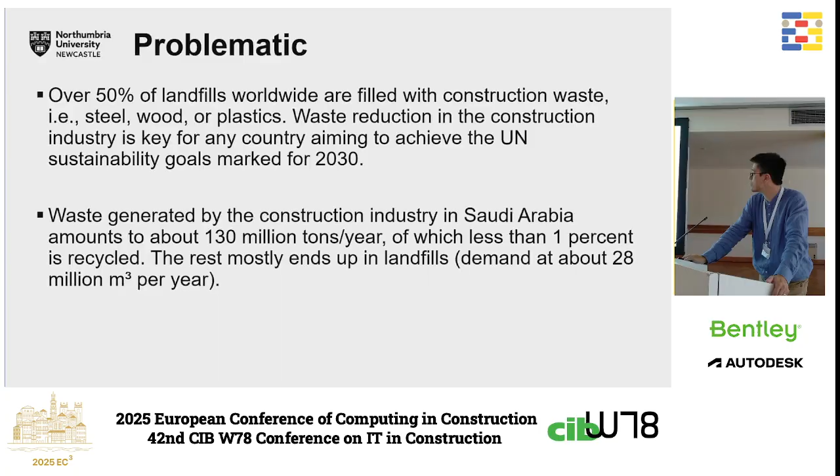Recyclability is another issue. So how can we tackle waste in a proactive manner, not just handling the landfills or the space it occupies, but giving construction companies a reason to be proactive in the waste management process and reduce it by their own means? So basically it's talking about the value of waste. I'm not talking here about demolition waste, just purely the waste generated on construction sites while the project is ongoing.

So building site waste is generated and accumulated in different points across sites. Usually if you have a proper waste management process, those points are well located in a specific location, maybe moving across time, but always in the same space. And you don't really know what's being thrown in there until somebody, usually from a third party, picks up your skip whenever it's full, and then it's weighed, and you get charged based on it.

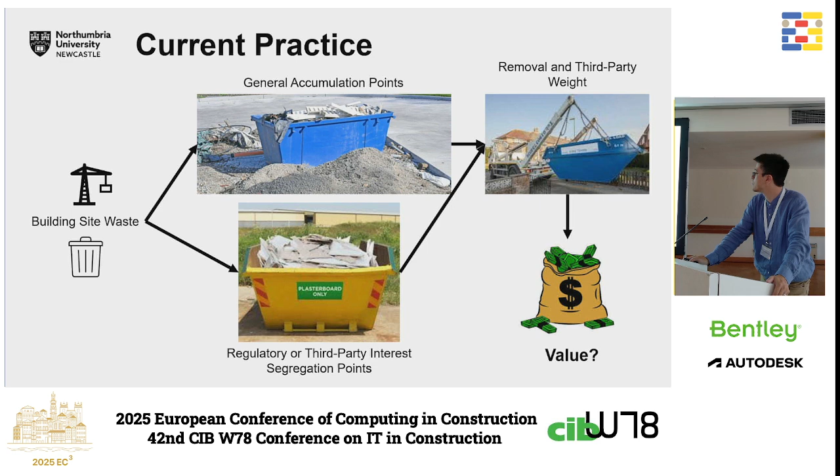So at the end of the project, you know more or less how much weight of waste you've generated because you're being charged for it, but you don't really know how much you've thrown away, so you don't understand the value. And that is where our project starts. Why can't I just tell you how much waste you're generating in projects so that you can understand how much you're actually throwing away in terms of money?

So this project aimed to develop a system that can understand how much waste is being generated and thrown away in skips, focusing on value-added information and providing a cost-effective solution, because we cannot just put a 60,000 or 70,000 pound system to visualize what's worth a few hundred maybe. So a really cheap, very simple system, and a framework around it that enables construction managers to understand how much is being generated on their sites.

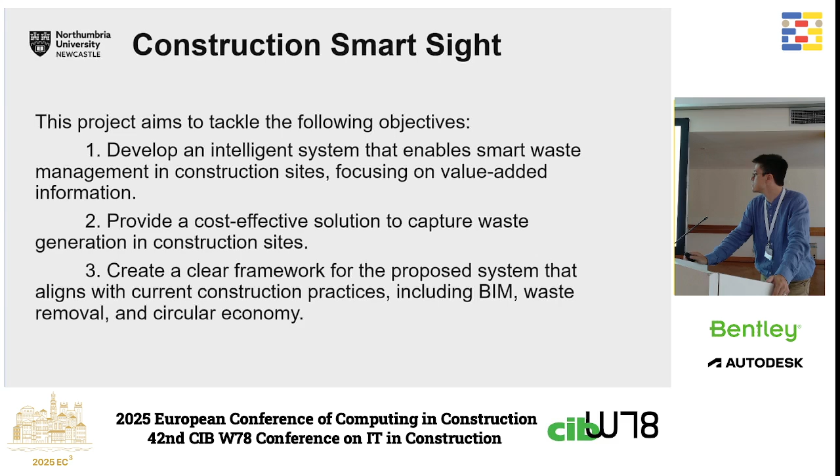So the framework is quite simple. You have a set of raw materials that go into your construction site, the usual types: bricks, steel, wood, ceramics, etc. Then there are different construction processes and activities on site, and future work will link what is being generated to the construction schedule, for example. But so far, the scope of this study is just whatever happens on the skip, at those collection points, capturing that data through video.

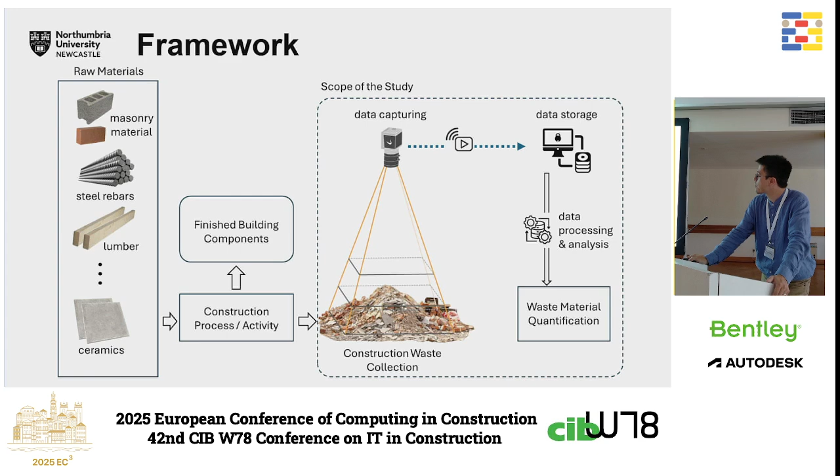So basically having a camera recording that skip over time, storing that information, and then processing it to quantify how much waste is being thrown away. The system is quite simple, as I said. It's just a camera on top of the skip to visualize what is actually going on. Not all of them actually look like that.

That is just an AI-generated image. But basically, the temporary structure that you create sometimes might not be necessary. You may use scaffolding that is already in place. You can use any other type of structure that allows you to actually put a camera on top. The camera is like 300 grams, so anything can actually hold it.

So usually what you have to do is really just minimize the distance between the skip and the structure, but also at the same time put it high enough so that it has clearance for the skip to be removed, so you don't want to interfere with the waste management process. In this case, the cameras are usually located between 5 to 6 meters high, so you get an idea that it's quite a high system.

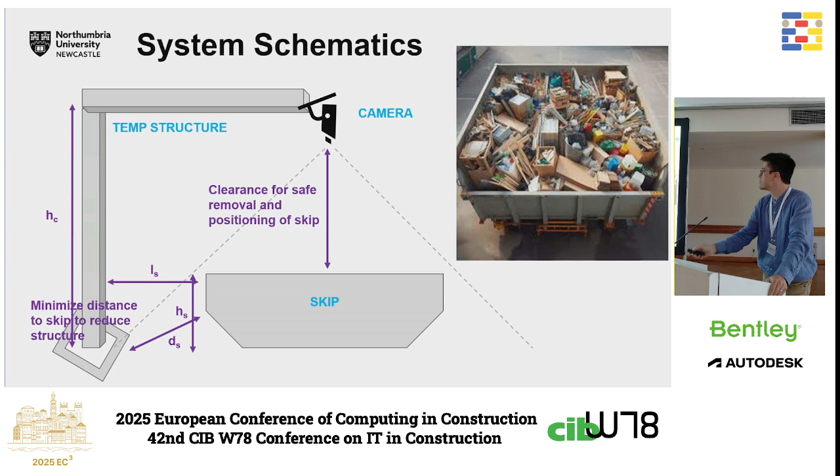But nonetheless, once the camera is installed, it doesn't really need to be exactly located in the center of the skip. The skip might be located in one place, and when they remove it and put a new one, it could be in a different location, more or less in the same space, so you have to be flexible in terms of orientation, angle and position. So it doesn't really matter. The algorithm is quite simple.

In terms of computer vision, you need to have a way to identify whether the skip is being placed and loaded and unloaded, so that you have a way of defining what is skip 1, skip 2 and skip 3. You have a waste tracking and classification process that is triggered the moment that there's a skip on the site, and you go frame by frame, basically.

That creates a time series of information until the skip is unloaded, and then you start to look into waste quantification and waste composition. That only happens when the skip has been unloaded. So basically, you capture information until the skip disappears. That is when you calculate all your weight quantification, and the moment another skip comes in, you start again. So the algorithm is quite simple.

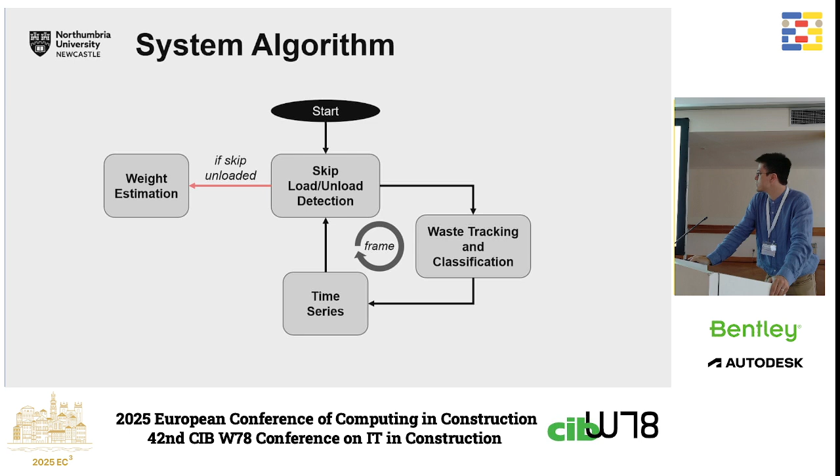So how do we do the skip load and unload detection? As I said, everything I'm going to talk about is quite simple. It needs to be simple because we're going on a frame-by-frame basis. When you throw waste into skips, especially not just somebody by hand, but an excavator bringing up a lot of brick, if you really want to look at every single brick being thrown in, your frame rate needs to be very quick.

So all the filters need to be very quick to be processed by a single laptop or anything like that attached to the camera. In this case, it's a very simple background subtraction and motion detection with very simple filters that are image processing based. Basically, whenever we see something coming into the area that has changed the way the background looks, we assume that it's a skip.

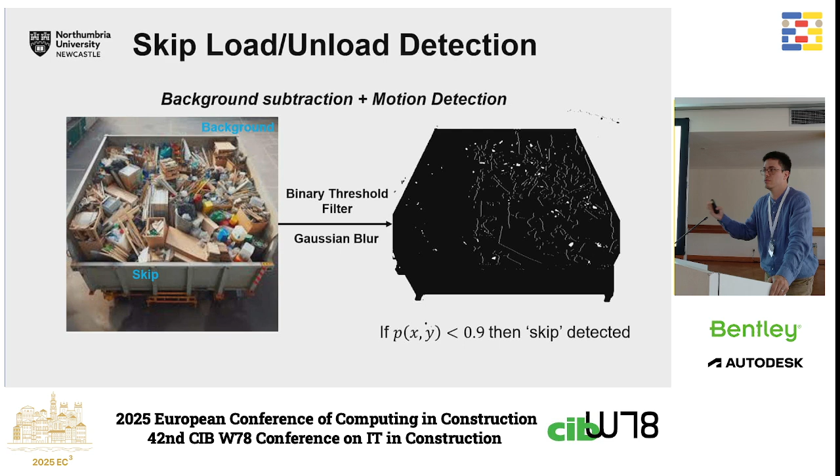That means that we have certain moments in which we get false positives. There's no skip in place, somebody walks through, that creates a skip, but it's no big deal. It's easy to filter out because usually there's no waste being thrown, so it will be just an empty skip that is easy to filter out.

The second part is basically tracking exactly how the waste goes through the image until it lands in the skip. We don't want to continuously capture the same elements, because if you're looking into a skip many times, the frames may look similar all the time, especially for the things that lay on top, and we don't want to count those all the time.

So we use optical flow estimation to see what the path of that specific captured point is, and once it's stopped, we keep track of that item and we don't count it more than once. It's mostly to make sure there's no overinflated counting of the same element in the skip. So you throw something once, and even if you detect it for the next 8 hours, it's just once.

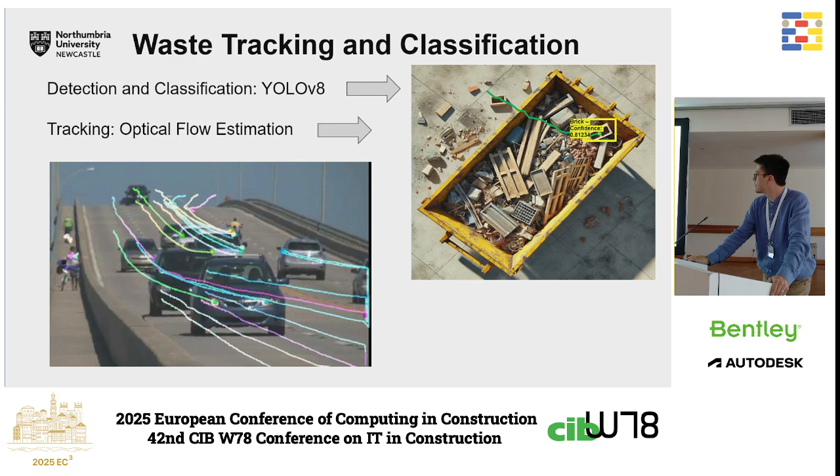The only issue that we have from now on is how you classify the different types of waste. I talked about raw material at the beginning. Waste classification in the UK, for example, has a very strict regulatory code with a lot of different classification methods, and it defines like 39 different classes and subclasses of waste. And we said, well, we can actually do that. So when we train our AI model, we use that classification.

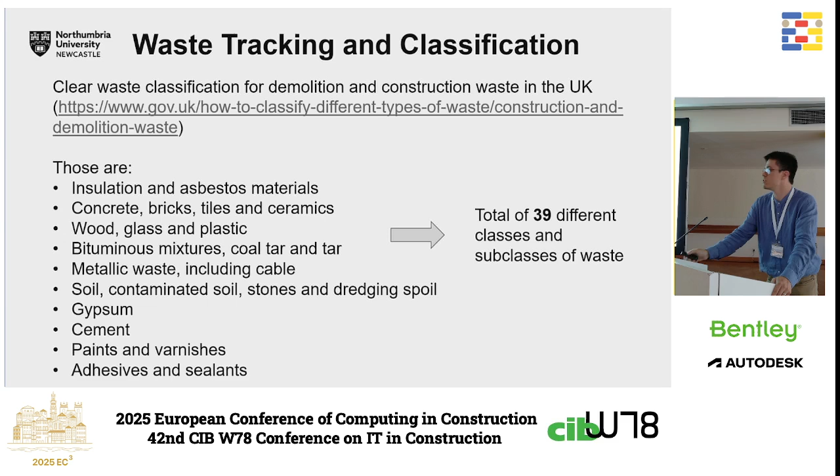That's not a problem, it looks like this in the UK. The problem is when you look at who actually receives that information to trigger some kind of circular economy: waste treatment facilities only use 13 classes. So that is something we're looking into for the future, how to link both classifications so they are better paired in order to help us make better classification processes.

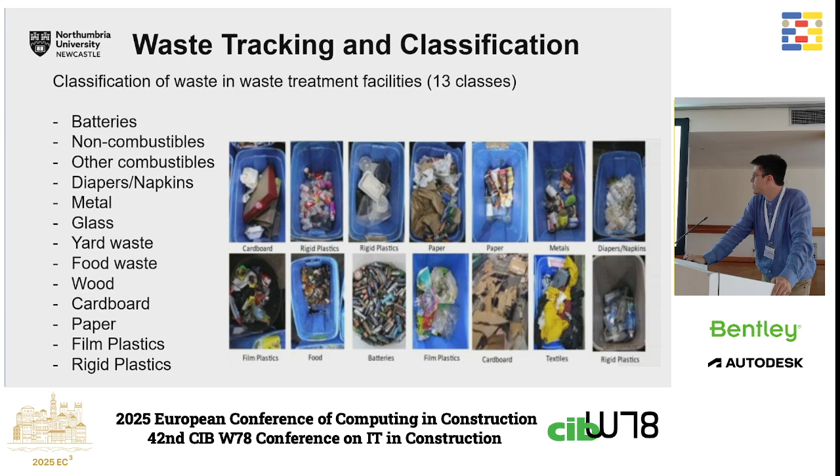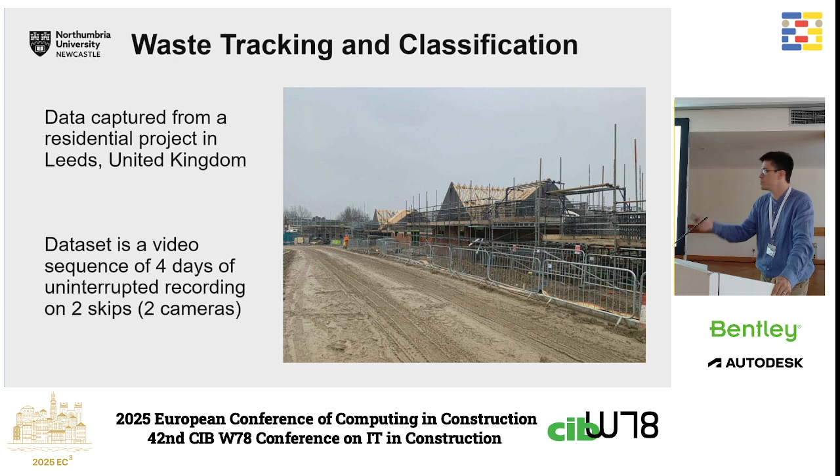But anyway, we use, in the end, the 13 classes in a project that was captured in Leeds in the United Kingdom. It's 4 days uninterrupted recording on 2 skips. Well, 2 skips on each camera, so 4 skips in total. And we use some of that data to train.

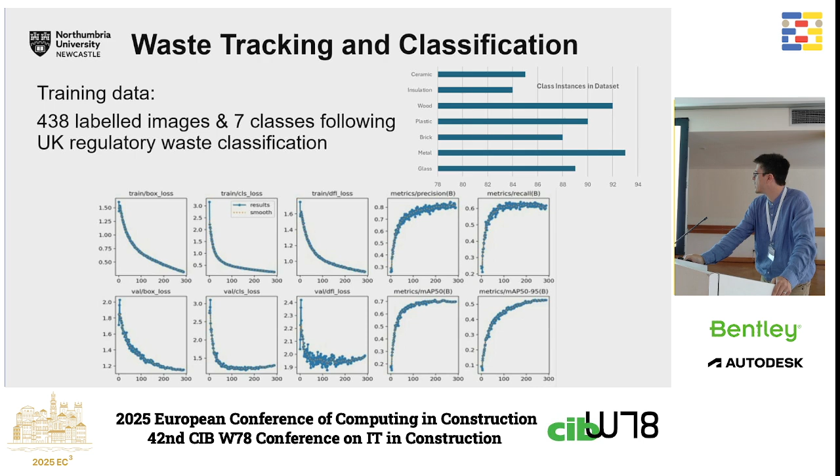So we basically labeled about 438 images of all the 7 classes, because I said 13 initially, but not all of the waste was actually visible in those days. So we only had 7 classes: ceramics, insulation, wood, plastic, brick, metal, and glass. We run it through, I think it was a YOLOv8 something model. And we captured basically all the data as it went through.

Finally, in order to get the waste of each one of the classes that is actually being recorded, we run it through a cumulative assessment where you basically divide, it's basically a ratio, if you want, of what's been detected versus the total amount of detections. And this is what you get in terms of results. So for each one of the skips, you get basically a percentage based on the weight that is being estimated, which again, I didn't say it, but we use bulk density in this case of the waste.

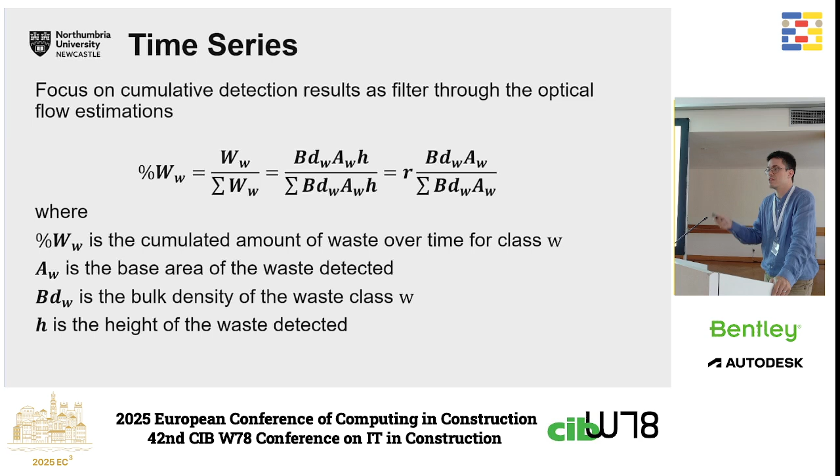We don't really know exactly what the density is for each one of the elements because we cannot identify, let's say, a specific type of plastic that's been thrown away. But in the waste management sector, there's something that is called bulk density. So if you throw a bunch of the same type of material, let's say hard plastic, there's an average density that you can use. So that's what we use in this case. And this is what you get. So you get basically a pie chart, if you want, of what the skip contains.

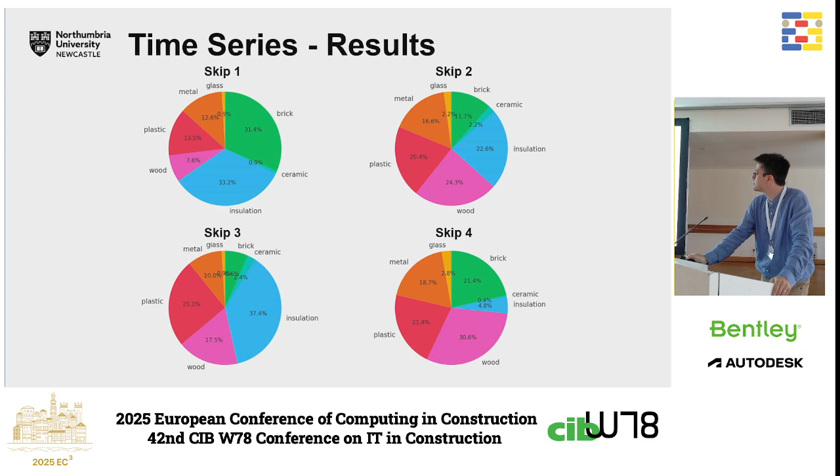Okay, so it could be, for example, skip 1, it's about 30% of brick, 30% of insulation, and that is percentages in weight, okay, not in volume, not in a number of things that you've thrown away. So the brick could be considerably low, but it's much heavier than the insulation, for example, and 13% in plastic.

So if we look at, for example, that skip, you will see that you can actually estimate the weight, and we compare the weight of each one of the elements that we captured for each one of the classes. So we went into that skip, we pulled it all out, and then we weighed one by one. So it was a lot of work. And we compare that to what the AI actually thought that the weight was.

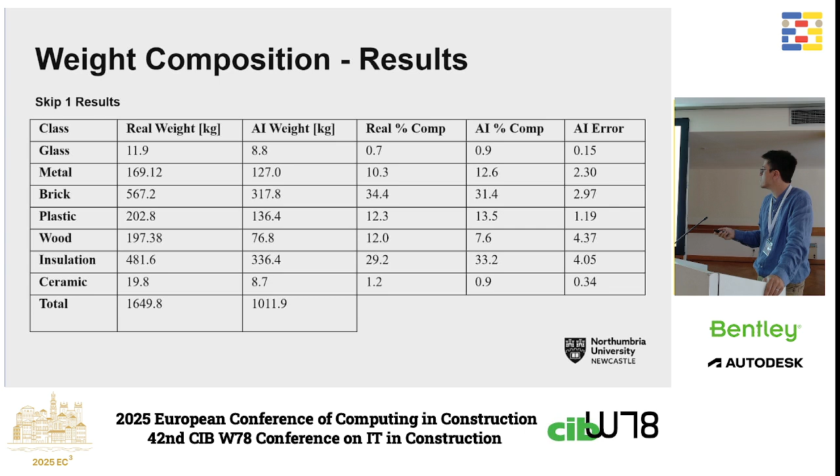And the reason for the weight being wrong is because usually we do estimations in terms of the shape of the form, since we're using very simple classification methods, not segmentation or anything like that, because we want simple outcomes. The volume obviously is definitely wrong, but that error that is being transported on any single estimation kind of evens out across all the different classes. So when you get a lot of data, it basically evens out and you get quite an accurate estimation in total. You get more or less 3 or 4 or 5% of error.

So conclusions, this is actually quite an alternative method to waste audits to get an estimation of the waste composition that you can create across construction sites. It provides a certain degree of automation that should enable at least the construction sector to actually start to understand more about waste generation in the projects, and obviously to reduce also the cost of those waste audits that actually happen on site. Especially in the UK, it's very important for hazardous materials.

And then, well, there's still issues that we need to go through in terms of all the stakeholders that should be aware of this type of material waste classification going on, that require maybe a lot more coordination to actually enable a more streamlined process in terms of information that is being generated by the system. And obviously trying to tie these results with what actually happens on site is our next stage, to try to understand really why this type of waste is being generated that day.

If that's something that we can tie, for example, to BIM schedules, it would be something very interesting, because if we can tie activities to what's generated, then the waste will become less of a surprise on the day that it actually comes in, and more of an expected number that we can then compare to see, for example, if there's any unprecedented activities going on site.